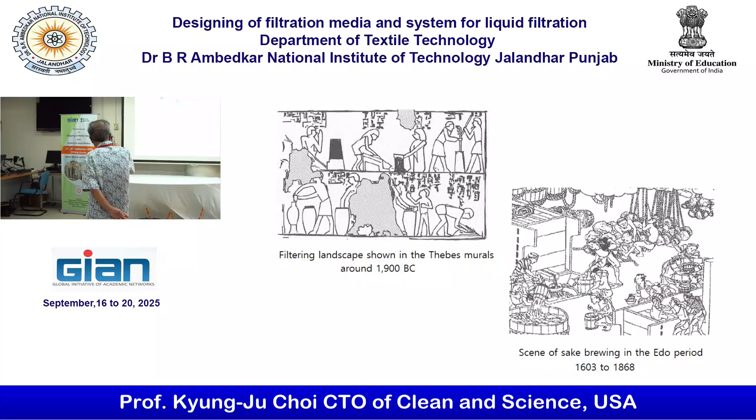Yeah, you're going to see this in your book. It started with something like this, the filtration. When you look at some pictures in the tomb murals, this one is around 1900 BC in Thebes.

But on the right hand side, this is a quite famous drawing. They are actually making sake. The making of sake involves several processes of filtration. Even though a lot of people are doing it, they actually squeeze the fermented rice to make sake. So in fact, filtration started BC, probably more than 3,000 years ago. So filtration has been around for a long time.

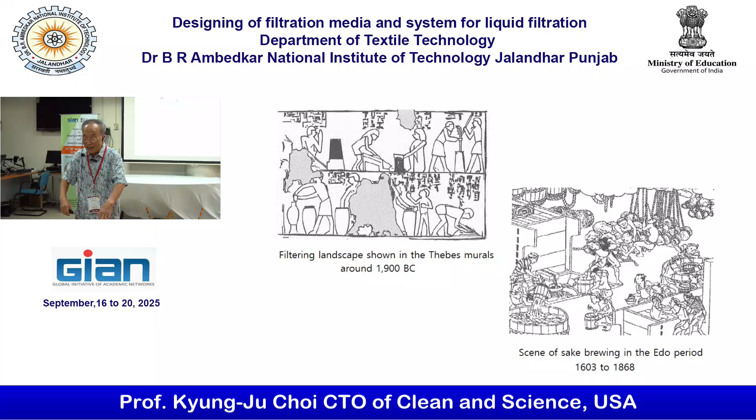One thing I can tell you: in the Bible, God created earth. He created several substances, day and night, and humans as well. There is some separation and filtration already there when you create something. The water and earth is a separation. So separation actually started way back at the creation of earth and human beings.

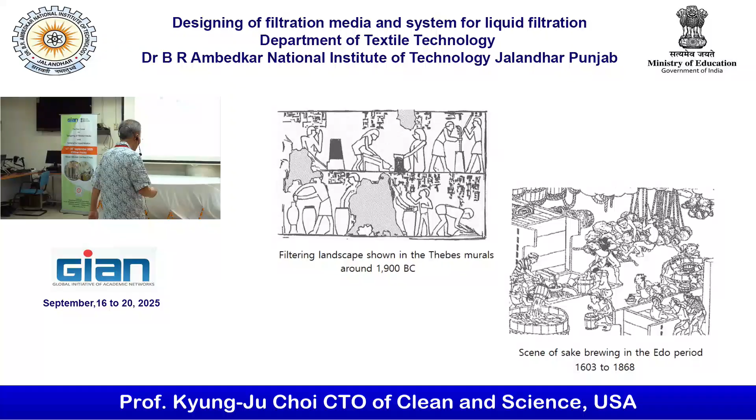Separation and filtration has been around a really long time. That's what it is. This is what I told you earlier.

The Fuji Mountain area has a lot of tasty water you can get. How come? This is what it is. Fuji Mountain, and inside it looks like a river, kind of, and then some sand comes out. Some of it goes into the sea, some of it you can actually drink. Sometimes it takes more than 100 years from the starting point to where the drinking water fountain comes out. So that's where sand filtration started.

This is what Professor Iritani started on his work. That's why I like it. But he didn't improve his work further, and he also didn't use Darcy's law. He used his own resistance, a kind of study.

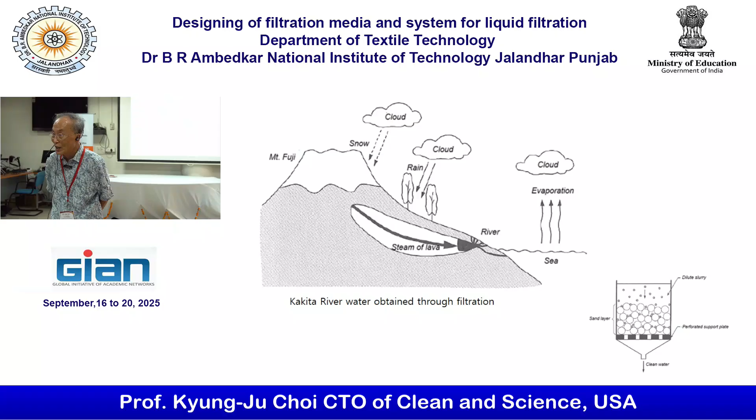You will see the book, but the book is really good. It's easy to understand. The other thing is there are a bunch of drawings and pictures there. That's what I like. So when you have time, it's not that difficult. The equation itself is not that difficult to understand. There is some integration in it, but that's all. I recommend reading that book. It's only less than 100 pages. That will help you understand liquid filtration basics.

Do you have a copy of it? An electronic copy? Not yet. Not yet.

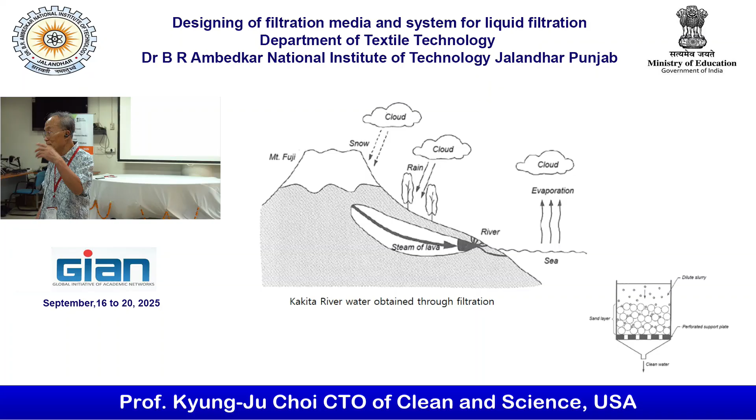So actually, that book started something like this. In fact, I really wanted to use that book for tutorial 2, but since you don't have it, that's why I made a couple of slides.

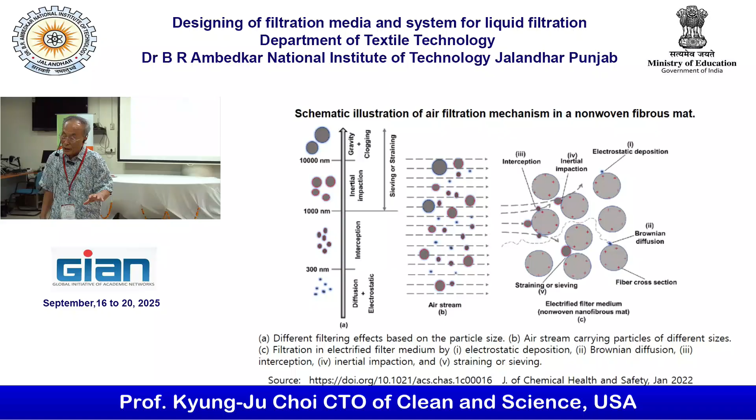Okay, here. Professor Mukherjee covered something, but I'm the person who actually did some experiments. So it's a comparison between air filtration and liquid filtration. There are so many similarities, that's what I'd like to say something about.

Here, less than 1,000 nanometers, 1 micron, then interception, and below 0.3 there's diffusion and electrostatic effect. This is basically for air, so airstream, something like this. Well, the source is right here.

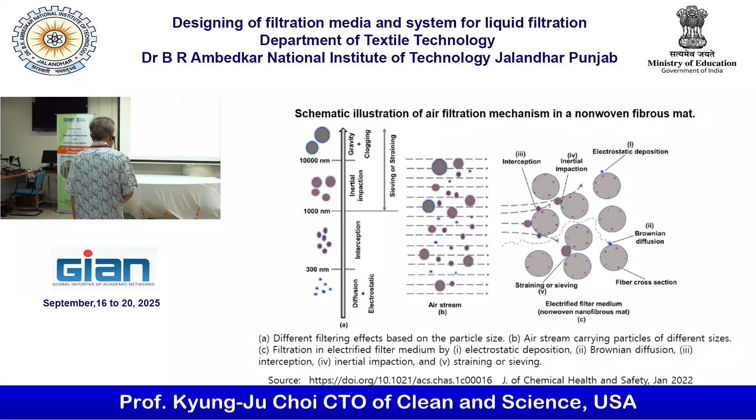Filtration in electrified filter medium and electrostatic deposition. This is the air filter, particle capture in the air filter.

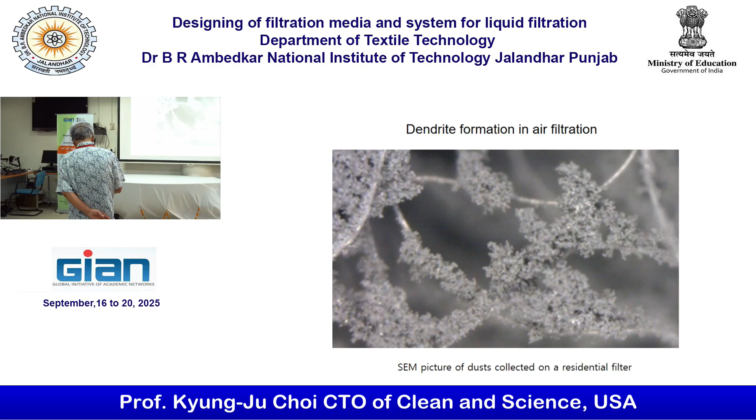What about the particle deposition mechanism in liquid? Look at the difference. But surprisingly, we can apply some of the mechanisms to liquid filtration. Hydrodynamic interception: for particles having a radius greater than the distance between the flow streamline, which carries the particle and the surface of the collecting grain in the bed, suspended particles will be intercepted by the surface and collected. This concept is really the same as in air filtration.

Also, diffusion and deposition in liquid suspension: small particles less than 1 micrometer are subject to Brownian motion. In this case, diffusion can cause random motion of particles, which controls the rate of particle deposition in the liquid bed. So this stays the same.

Electrostatic interaction: this effect is a lot less in liquid, that's for sure. Straining and sedimentation should be considered a deposition mechanism for larger particles with high density. Also, electrical double layer repulsion and van der Waals force are important for collecting small particles. Actually, this stays the same in air filtration as in liquid filtration too.

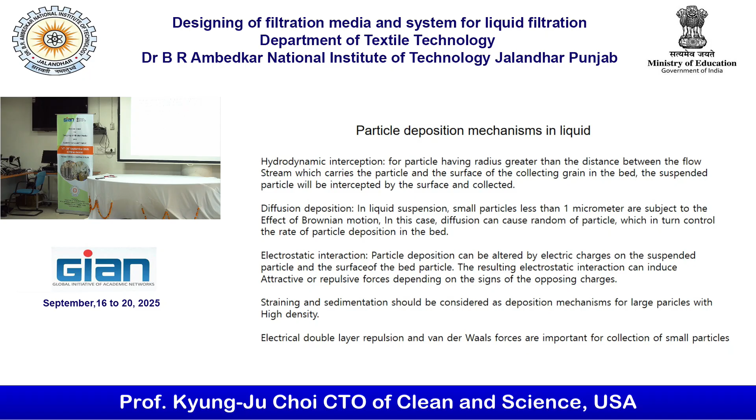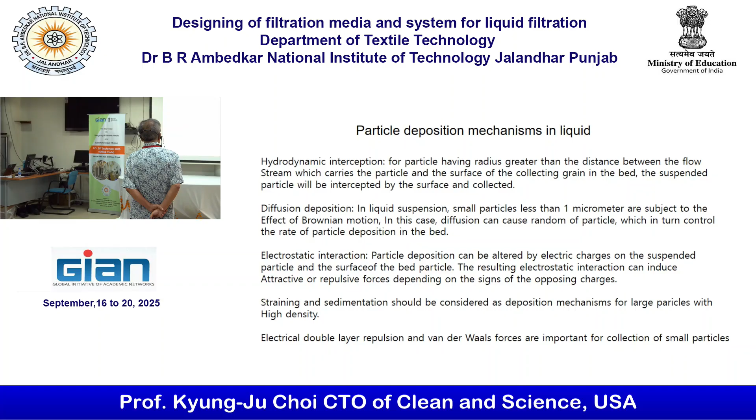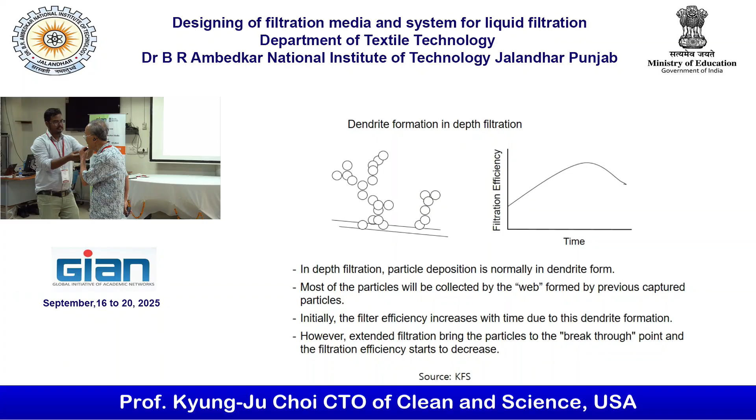Oh, what? No sir, I am not asking you. You are just relaxing my mouth. This is quite interesting, huh? Yes sir, okay, is that okay? That, yeah. Yes, okay.

Surprisingly, in liquid, dendrite formation is occurring. Normally, air is the normal phenomena for dendrite formation, but however, in liquid, somebody did research on it. It's the same thing, dendrite formation, as long as the liquid flow rate is slow.

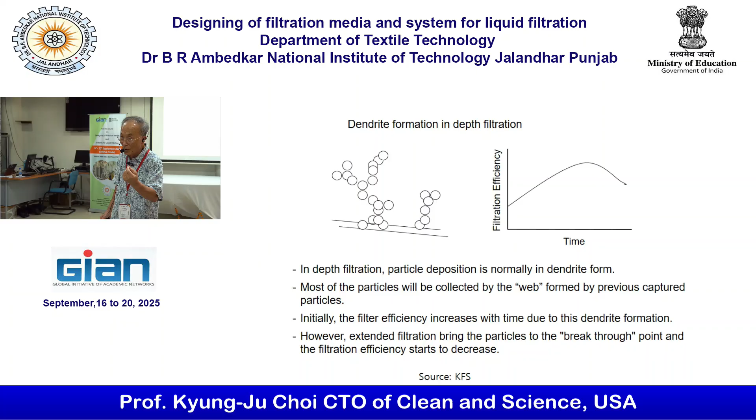So in depth filtration, particle deposition normally forms dendrites, this is exactly the same as air filtration. It occurs in liquid as well. So most of the particles will be collected by a web formed by previous captured particles. Initially, the filter efficiency increases with time due to this dendrite formation.

So there are some breakthroughs, which means it's not going to stay long. It drops out, not like air filtration.

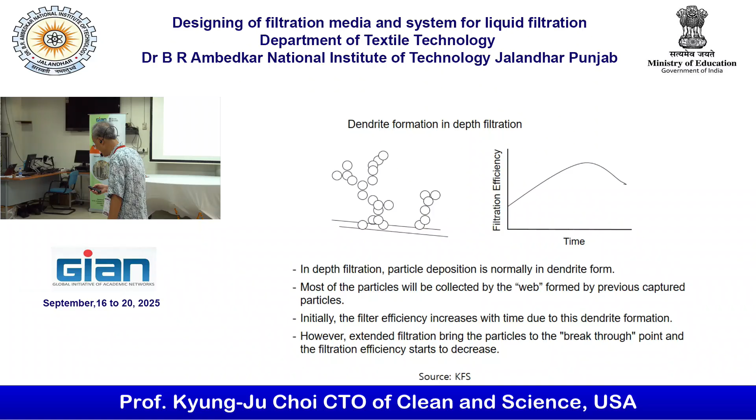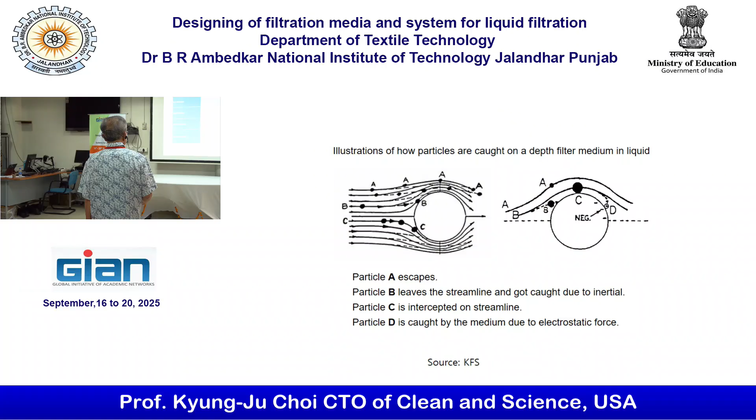We already covered that one. But the important thing is, whatever the air filtration mechanism, it can be applied in liquid as well. That's the key message. Cake filtration, depth filtration, surface filtration, and cross-flow filtration as well.

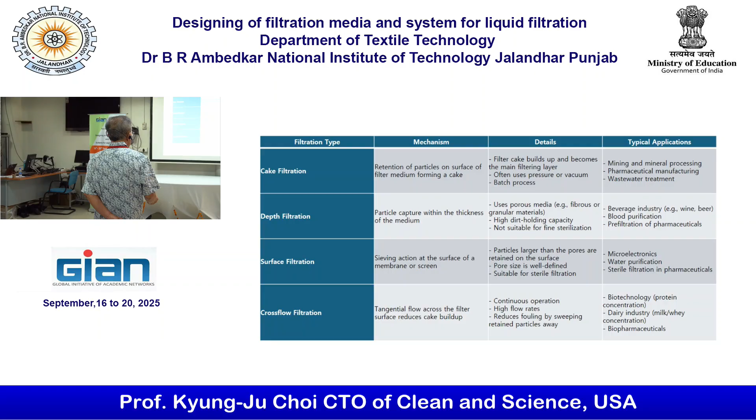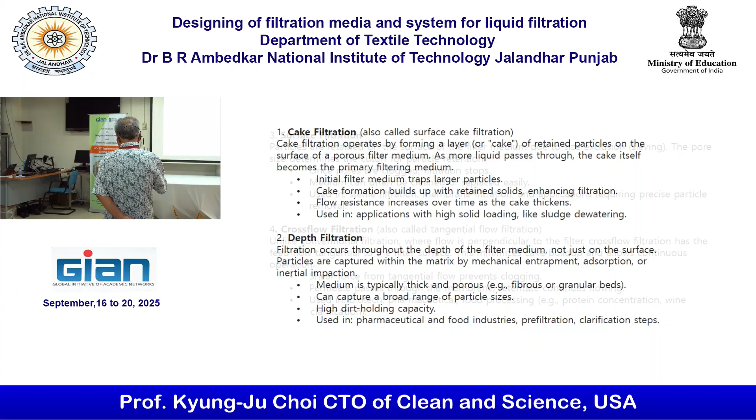So you can read through this one. Cake filtration, depth filtration, we actually covered this a lot. So cross-flow - yeah, cross-flow is quite an important part of it.

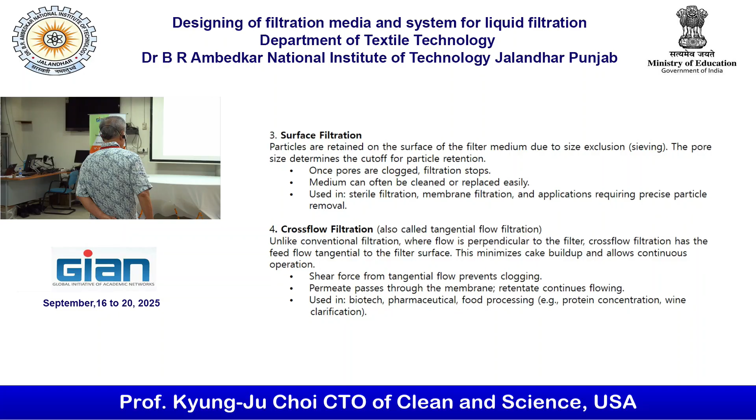Yeah, surface filtration, cross-flow filtration. In fact, the upper part of the drawing I got from the book, the Iritani's book. I think the drawing he presented is really close to this one, the depth filtration and particle capture, collecting media.

Then why do you have to use filter aid? To try to avoid particle collection on the filter media. That's why you need to use the filter aid.

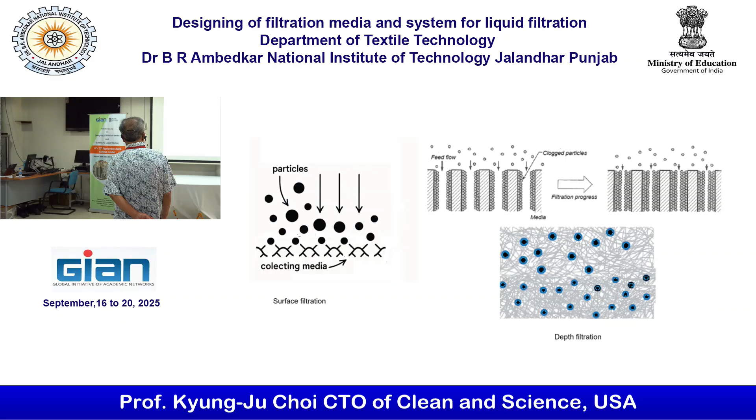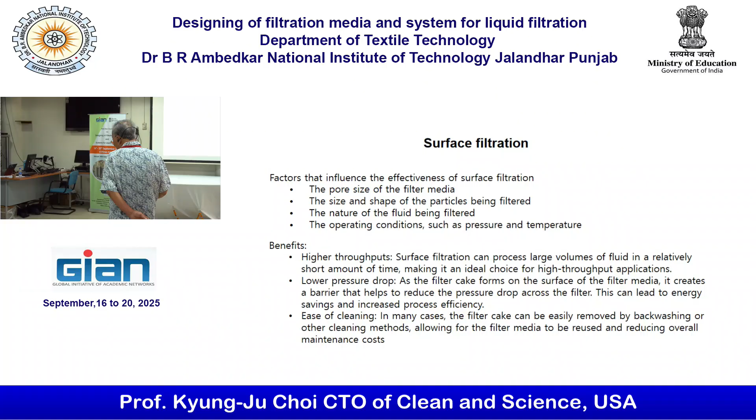Well, this one we already discussed previously - surface filtration, depth filtration, and cross-flow filtration. I got all the drawings from your book. Yeah, no, the book you're going to have it, yes.

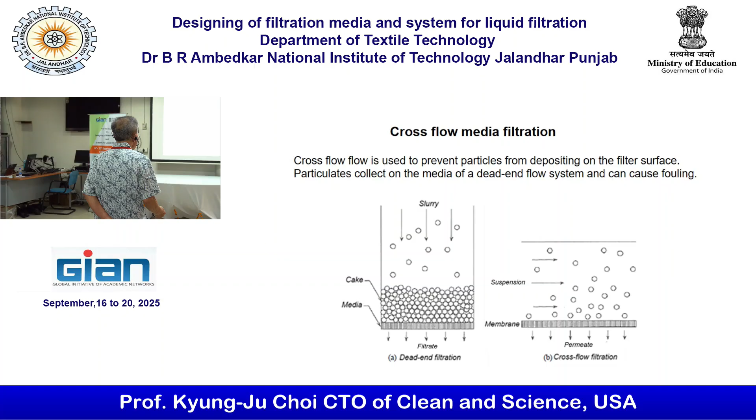So if it is cross-flow filtration, somehow you have to use pulsing, which is quite important to remove the particles on the membrane material.

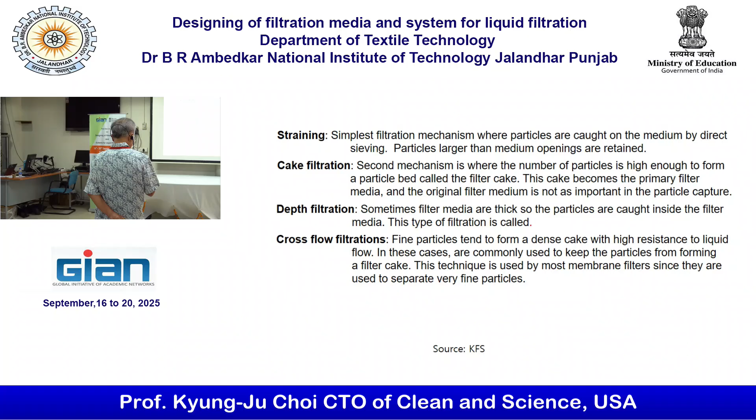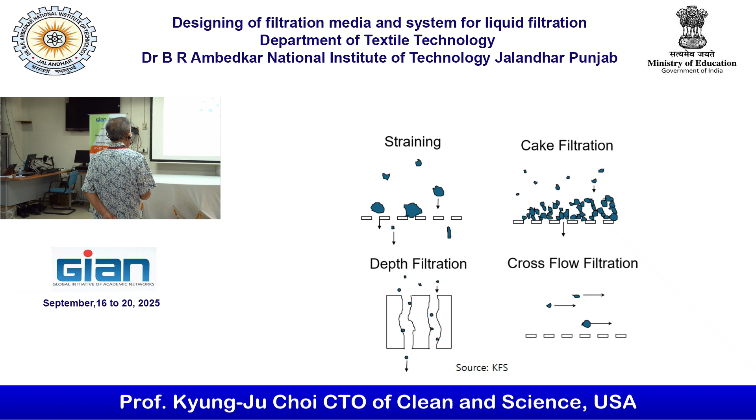Straining - actually straining is a key mechanism for liquid filtration. Again, larger particles than the filter medium opening removes it. In cake filtration, same thing - right here, you block the holes.

So in order to prevent high pressure drop, that's why we need to use the filter aid. Diatomaceous earth is a really popular filter aid. However, recently they found out that material is carcinogenic, so the handling is a big issue. It works really good, but recently found out that it is a carcinogenic material.

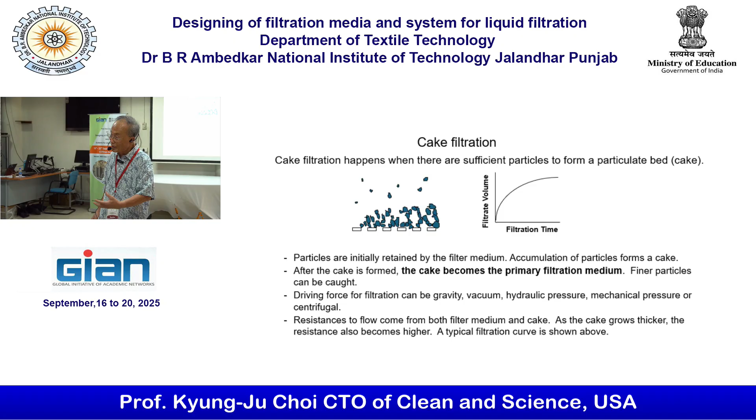That's quite an important one. But when Iritani wrote - actually he did not write the book, his student wrote it. It's not really write the book, it's more like a manuscript. But in fact, I'm the first person making an English version of it. I'm going to add a lot of other material into MBR as well. I don't know how long it takes - I hope in 3 months or so.

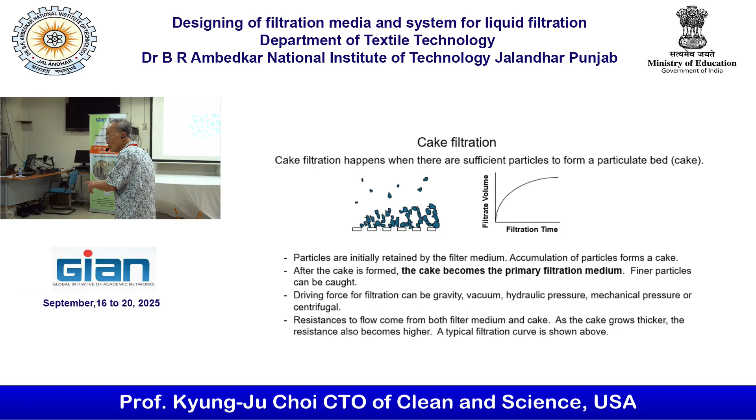The issue is currently he is preparing our testing equipment, filter testing equipment.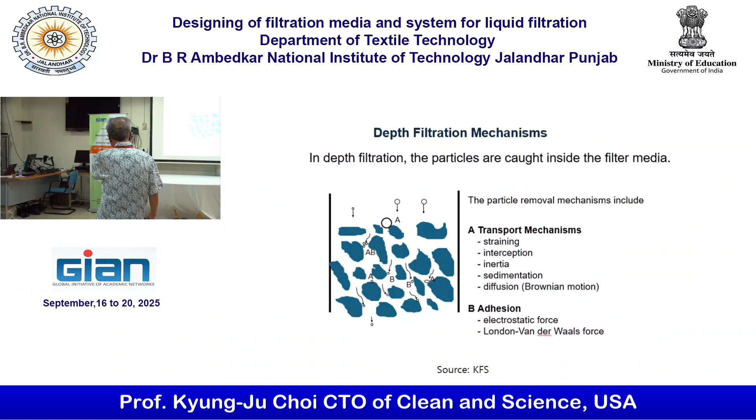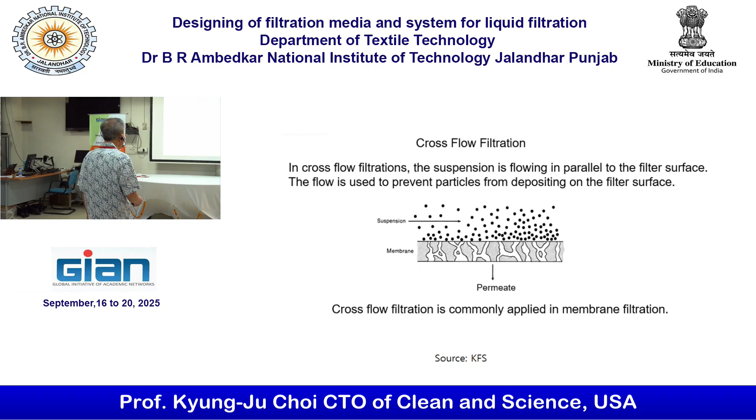Cross flow, we already know. Cake filtration - okay, compressibility is quite an important one. I don't know whether I have the Kozeny and Carman equation here.

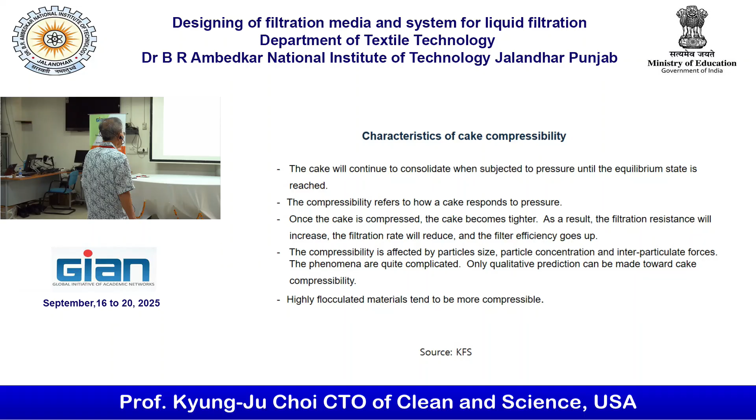Right here, that's the end of it. Right there. No, that's fine. This one, S, is the...

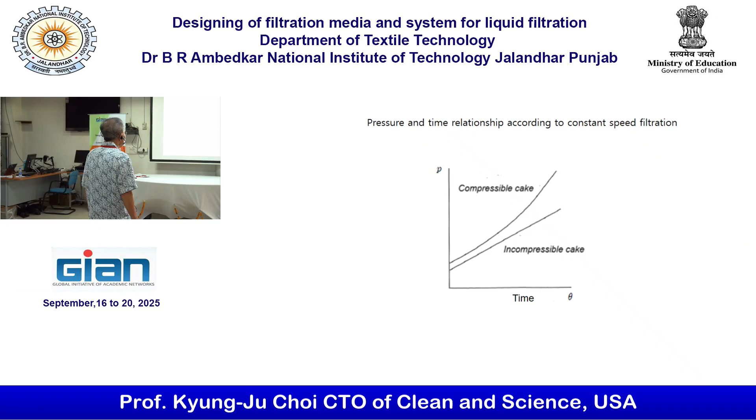Kozeny constant there, but it's more likely the Darcy's equation. But actually, the Kozeny-Carman, they actually consider big particles as well as small particles, and the relationship between them.

Yeah, the surface, depth, cake - description is there, and media used and common application.

Can you bring the sound a little lower? No, sound lower - is it okay, sir? Yeah, oh yeah, I think it is better. I hope.

So pressure filtration, oil purification, food processing, and cake filtration, centrifugal - this one, pre-coat filtration. That's what I'd like to look at.

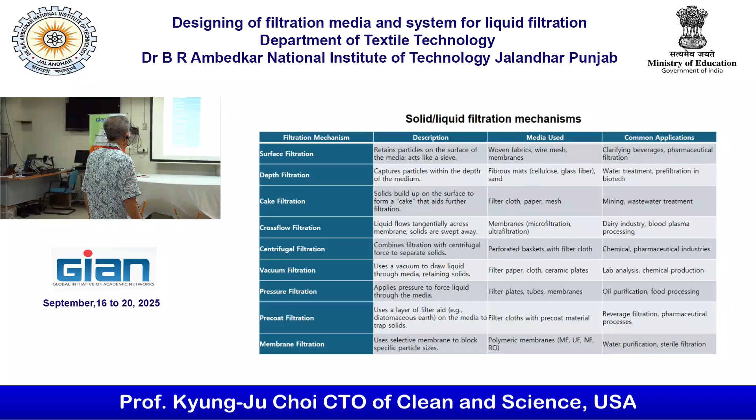This one, yeah. Pre-coating is the process of applying a thin layer of filter material, such as this one - diatomaceous earth. This is really popular, a lot of people are still using it. But the important thing is this is a carcinogenic material they found out recently, so when you're handling it, you need to be careful.

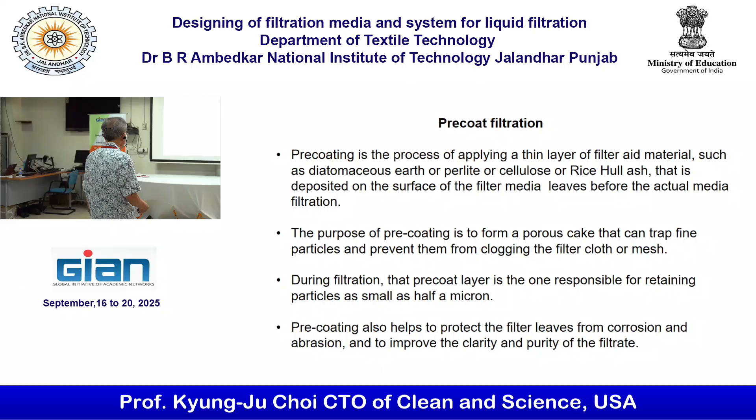Yeah, I brought some samples - cellulose, rice - you'll see later on. So how is it working? I'm recording, this is what it is.

Filter aid is right there. That's why it actually avoids blocking of particles. That's what it is.

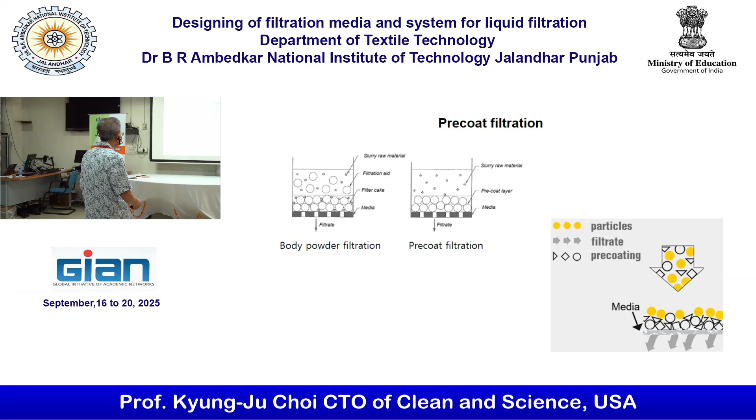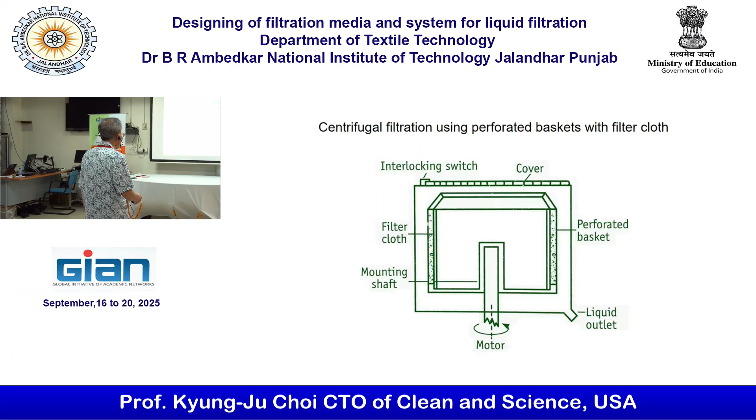The centrifugal using a perforated basket with the filter cloth outside - the same principle. Perforated basket, filter cloth mechanism, and filter system, discharge system. I'm going to use this one.

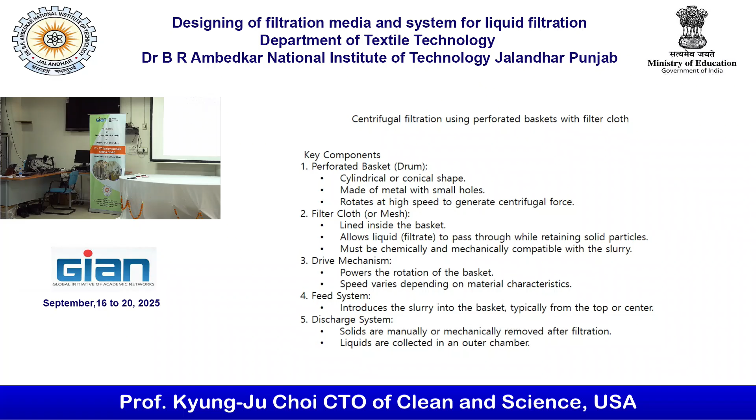Key components of centrifugal filtration: perforated basket, cylindrical metal and cloth inside, and driven mechanism for rotation.

Feed the slurry into the basket, discharge system.

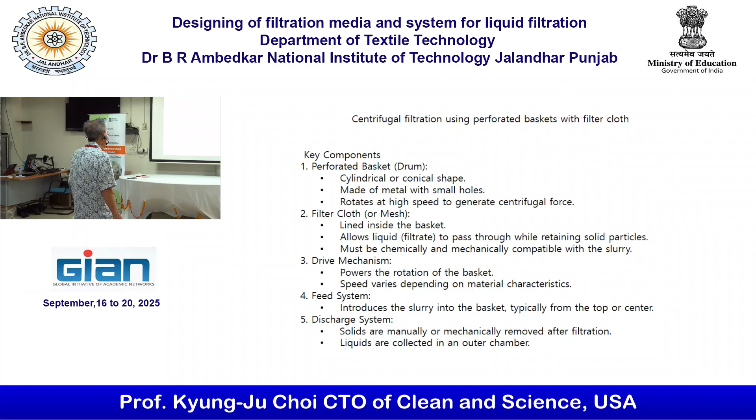The advantages: fast separation, good for large volume continuous processes, can handle abrasive or crystalline solids, and relatively dry cake formation.

The limitation is it's not suitable for very fine and compressible solids. It also needs regular cleaning, and the trouble is the cost of equipment is very high.

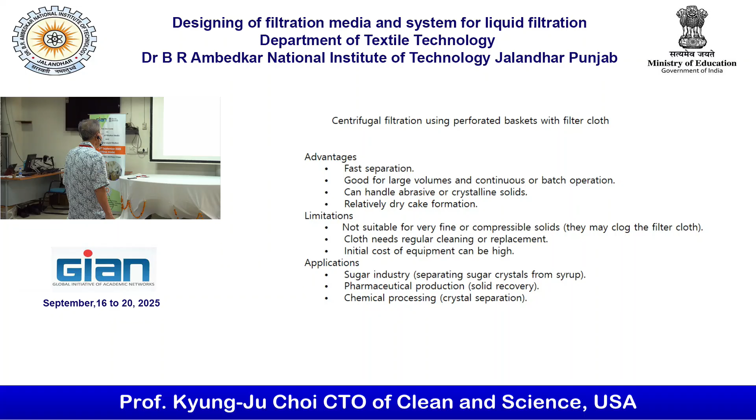Where is the application? Sugar industry, pharmaceutical, and chemical processes.

I already showed you this one, but this is my last slide. I actually shipped this one to Dr. Mukhopadhyay, but he had a hard time getting it through customs and immigration because I separated it into two pieces. I'll show you.

This one I use a lot when I do filtration research. It's small, but it's really good for liquid filtration testing.

You can put any type of media right here and close it like that. Also, there's packing material here. There's no bypass at all.

I bought it 30 years ago. At that time it was $1,000. Right now I don't think you can buy it. If it's available, it will probably be about 3,000 or more.

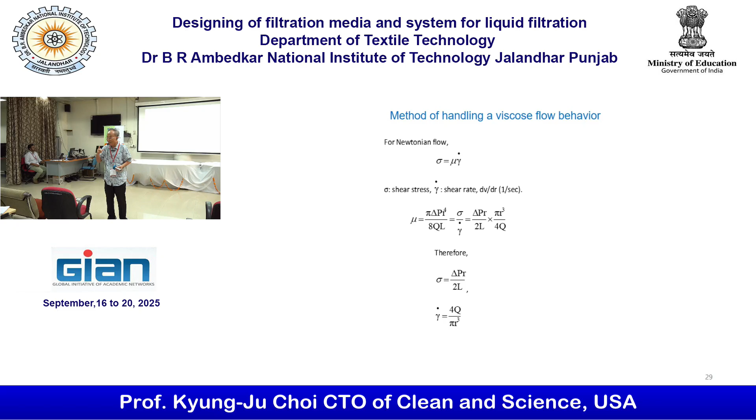The theory behind it is right there. Okay, here. This is stress: Delta P, that is, you're going to measure the pressure.

R is the diameter of this capillary, okay? Only this capillary. The diameter of this is 5 millimeters. I want you to write it down. It's not diameter, you have to use radius, 2.5, but it's 5 millimeters.

What about length? Length is 79 millimeters. I have to check whether it's 79 or 78, but it doesn't really matter. Yeah, 79.

I don't know whether you can see it or not, but this is the drawing along with this one. Here, this piece is the filtration section only. This is making the slurry, and then you want to inject that slurry right here. How?

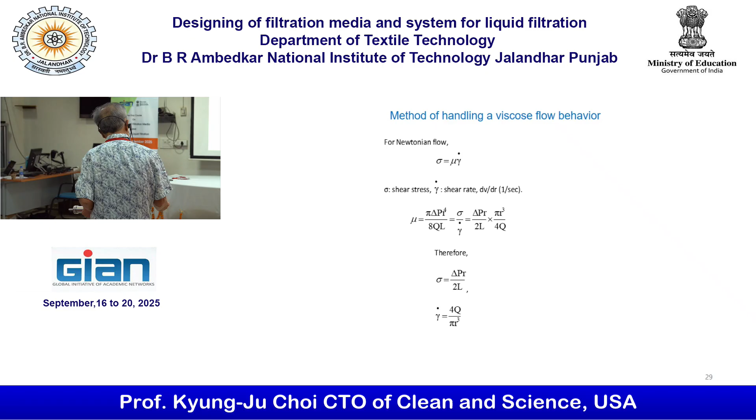But basically, here, Q you're going to measure. And P, of course, you know. So once you know the pressure, and R we already know, and we already know the length, then you can get stress right there.

You can get stress. And then what about strain? How are you going to get it? Here is the volumetric flow rate, so you actually get the weight. You don't need this, right? Okay.

So once you obtain Q, then everything you already have. So you have strain rate - it's not strain, it's strain rate. So then what is viscosity? How do you want to measure the viscosity? Use the Newtonian flow equation right there. You have strain rate, you have stress, then you can obtain viscosity.

So today we're going to use water, so you have to find out whether your answer is 1 or not. It's quite an interesting one.

Originally, I wanted them to make something like this so that we could use different slurry and test constant pressure experiments, constant rate and variable rate, something like that. That was the original plan, but it didn't work out. But it's a lot better, because using this equation to understand strain rate and stress, in order to get viscosity down, I believe it's going to be fun.

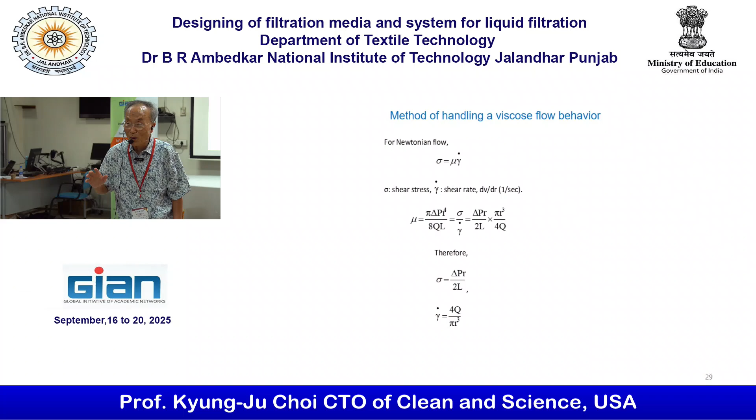It looks like a quite simple task, but it's actually quite important as far as understanding engineering principles. So I hope you can enjoy it.

I used that equipment a lot when I was working with the Cummins diesel engine company. This is a small one, but you don't have to use a lot of liquid there. That is better.

What will the accuracy level be? Every experimental procedure has a lot of error. So how are you going to get it? Repetition - 10 repetitions, something like that. It's an average.

Ajay and myself, we spent a lot of time preparing something like this. Whenever I have an invited lecture, something like this, I always emphasize experiment, experiment - that's actual learning. The hands-on experiment is quite important to understand the principle.

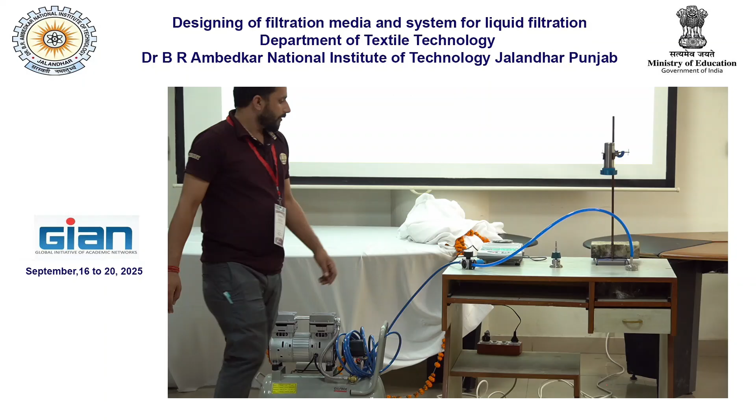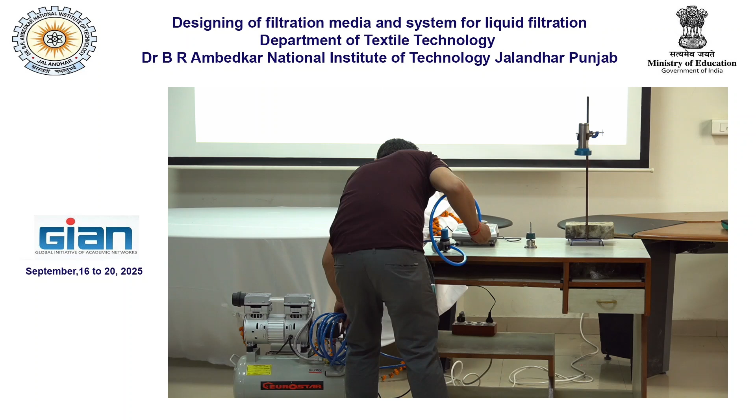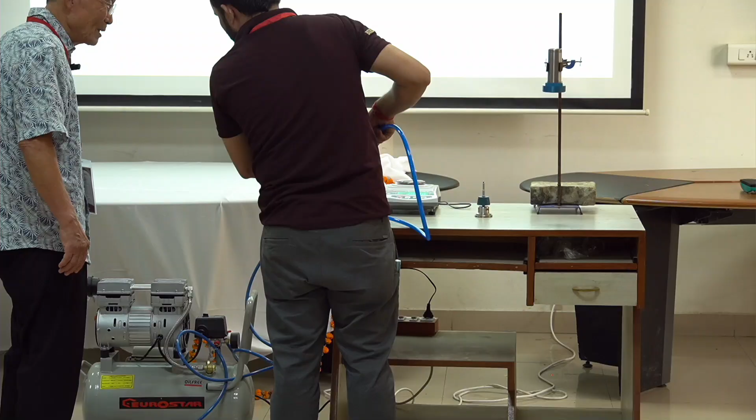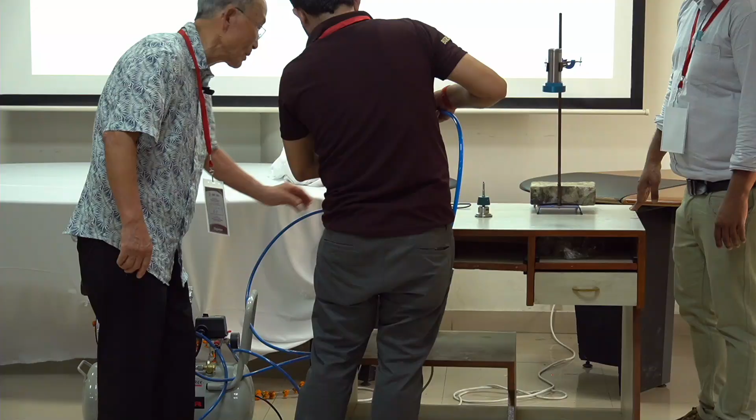It's okay, now we can do it. Are you going to demonstrate, or some of them come here and do the experiment? How much pressure should we use? That's minimum, but you have to read through it. I don't know whether you can read. Yeah, 2 is good enough.

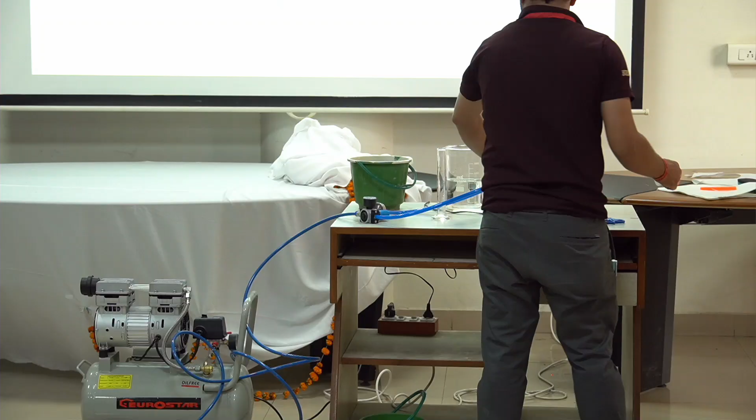Do you have a copy of the paper? Sir, yes sir, we have. Okay, yes. If you look at the pore and permeability, equation 11 is over there. We are using equation 11, the so-called Hagen-Poiseuille's equation.

Yes sir, which one? Yeah, this one, no? Correct. Yeah, this one, this one. But Hagen-Poiseuille's equation is 11. Okay, yes sir. In fluid mechanics, V is what? The V, okay, reduced. Instead of V, we are using Q instead. Okay.

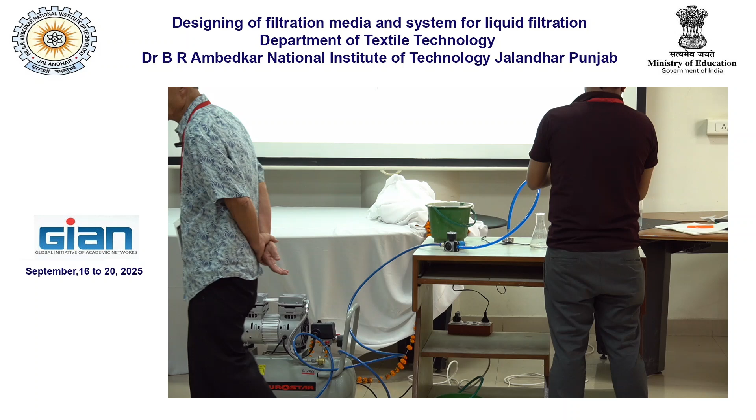Well, yeah, he needs assistance. Anyone come out and help him out.

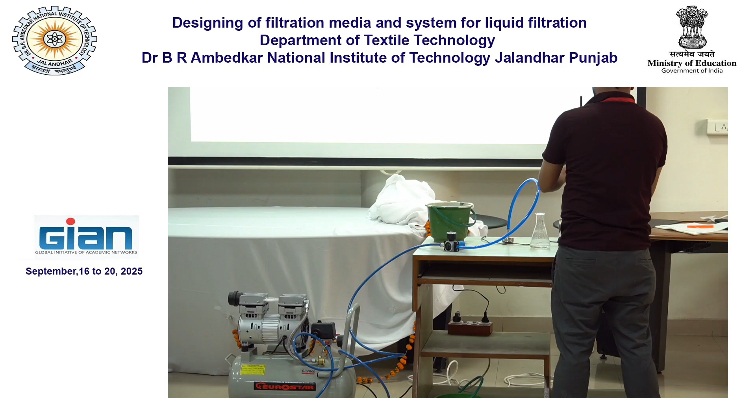So if you really like to do the experiment, then somehow you have to know the viscosity of the liquid you are going to use, that's quite important. Also, once you obtain the viscosity, it is a function of shear rate, which means when the rate is faster, what happens normally? Viscosity drops. So in liquid filtration, temperature is important, but viscosity is a more important parameter. So this experiment will help you understand the viscosity value.

You don't have to sit down there. Come out so that you can have your own hands-on experiment.